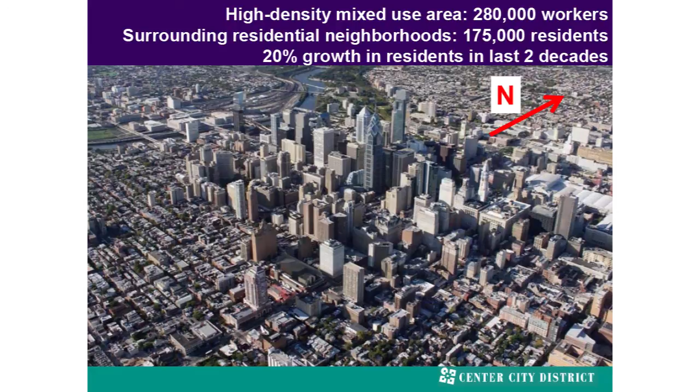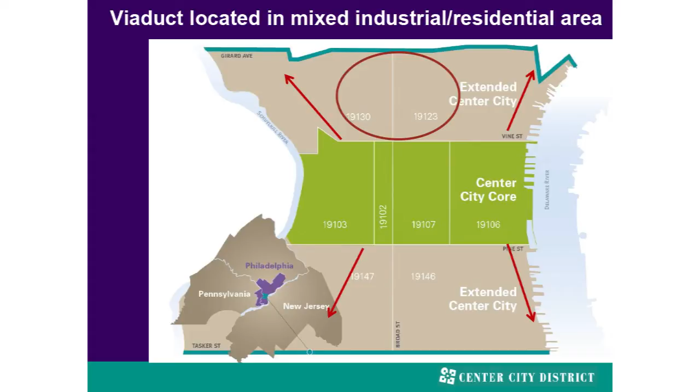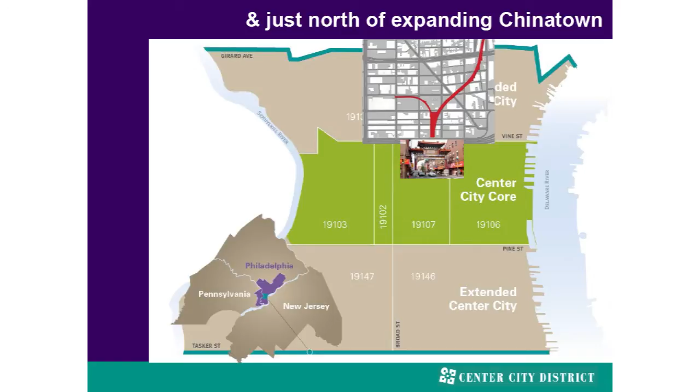So this is an elevated portion. It's just north of the central business district of Philadelphia, in the area where that arrow is located, so we have a very dense 280,000 person employee downtown with a very expanding and vibrant residential area that's grown by about 20% over the last 2 decades. This is just north of that area in an expanding residential industrial area near the business district, but also in what had been a former industrial district. It's just north of our expanding Chinatown community, and there are a lot of issues we've had to work through between two different visions for that area.

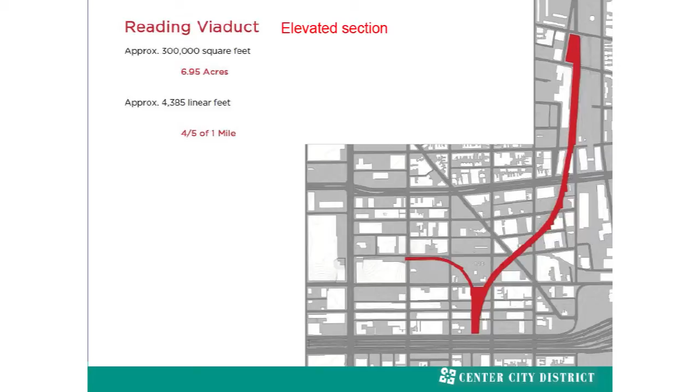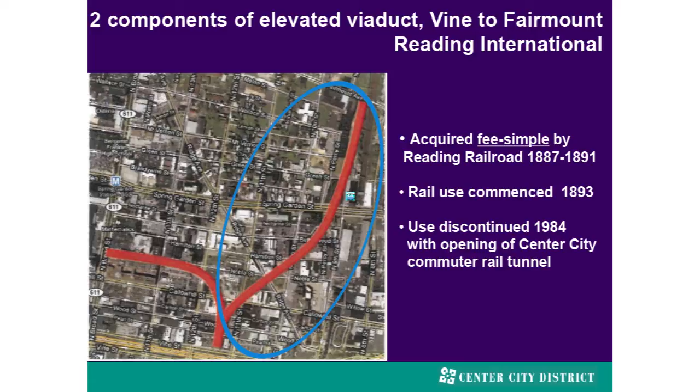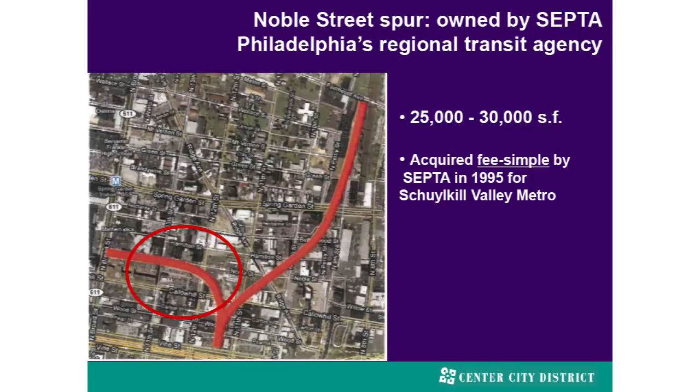The western or eastern branch is still owned by the Reading Railroad Company's successor company, Reading International, who's now in the movie theater business. They built this viaduct as a company in the late 19th century, continuing all the way through till 1984, when a new railroad station made this portion of the viaduct obsolete. The left-hand portion, which is only about 30,000 square feet, the most advanced part of the project, was purchased by our regional transit agency, SEPTA, and had originally been planned for a rail line that is no longer going to be built.

And then Leah will talk about the piece that starts in the dotted red line, which is the underground portion of this. So there is a vision of an integrated, elevated, and depressed portion.

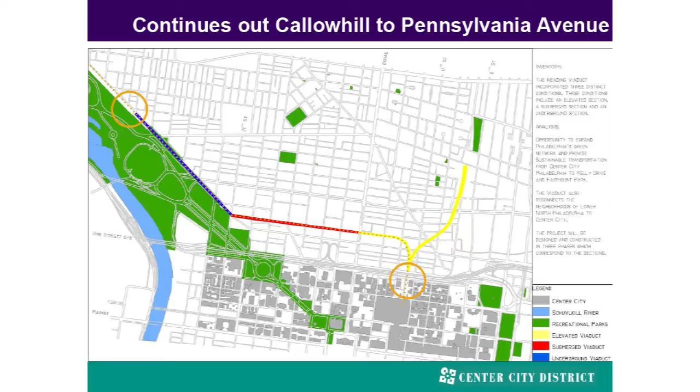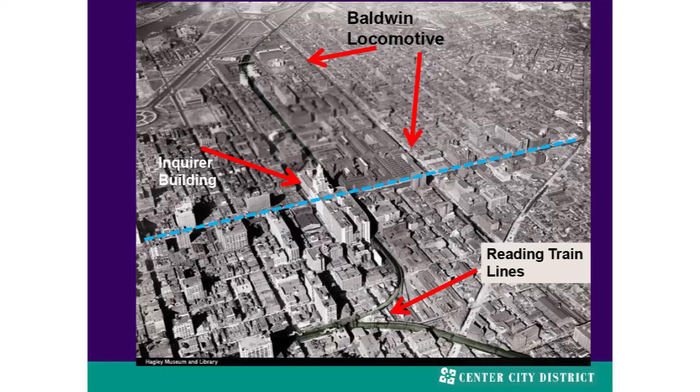This was, as you heard, like yours, a former industrial rail line, but also for us a passenger rail line. The blue line is our Broad Street. Leah will talk more about Baldwin Locomotives, the largest railroad manufacturing company in North America, which was served by this, and then you'll see the Reading portion in the lower area. The trains originated out of a train station that still exists on Market East, the Reading Head House, and underneath that today we have a very vibrant farmers market.

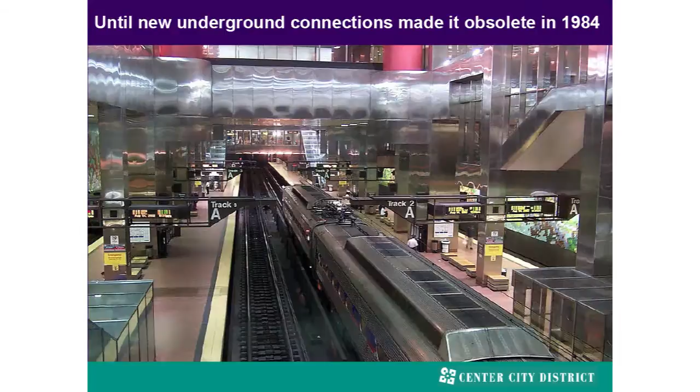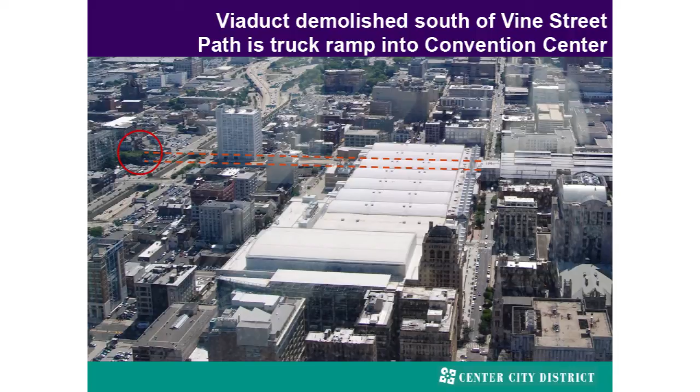This remained in active use until 1984, when that new underground rail connection made it obsolete, and it's been converted into the gateway to our modern convention center. The convention center is the white building in the foreground, and an elevated portion of this was demolished to make way for a truck ramp to come into the convention center, and the viaduct today starts where I've circled over there on the far left.

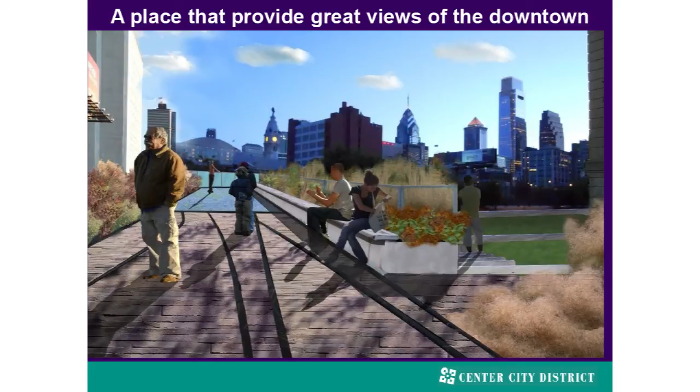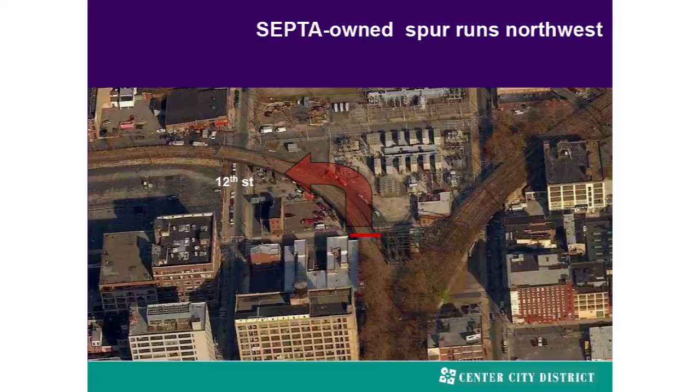So the viaduct today starts just north of Vine Street between 11th and 12th Street. It's a location that provides extraordinary views of the downtown. It splits in half, and the left-hand portion, which is most advanced, is owned by a regional transit agency. The right-hand portion, like your High Line, curves across the grid, giving you this positioning over different streets. It gives you very unique views of landmarks, of iconic bridges, and of endangered buildings, so you get to see the city from a totally different angle.

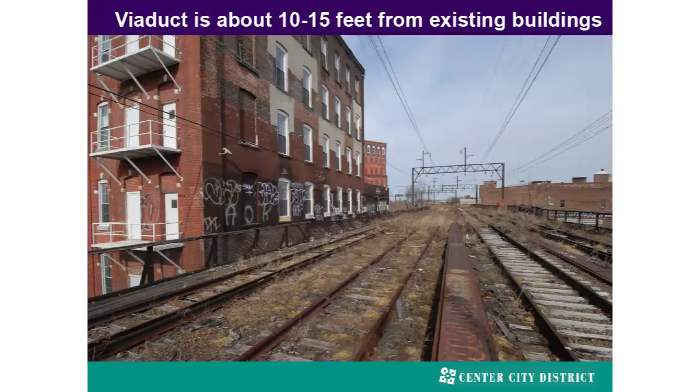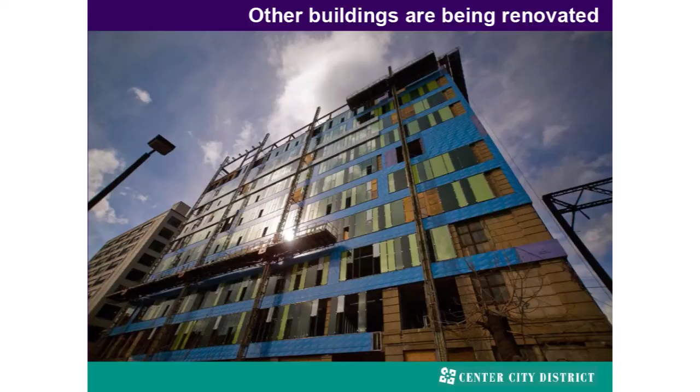It's in very close proximity, as is yours, to older industrial buildings because it was the delivery system for all the industries that were there. So the viaduct is sometimes 10 to 15 feet from buildings, sometimes 7 to 8 feet from various buildings. Many of those buildings have already been converted to condos, lofts, businesses, artist studios. Others are in the process of being renovated, but there are a huge number of vacant and underutilized buildings within this area.

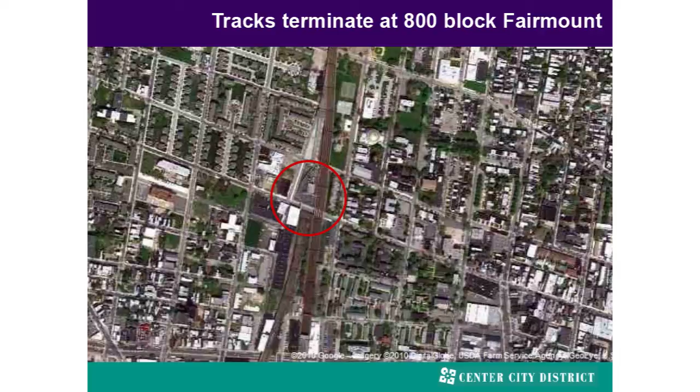Some of them are positioned to have great views, and the viaduct itself terminates up at Fairmount Avenue. During the last 20 years, it returned to natural life with lots of growth occurring, and it became something every student in every architectural program in the region studied.

The real work here began, and I'm delighted Sarah McEneaney is here. She and John, inspired not only by the viaduct itself but by the work here, organized the Reading Viaduct project and began in 2003 to advocate for this project. They've led thousands of tours, only one or two of which are probably legal. None of them are legal.

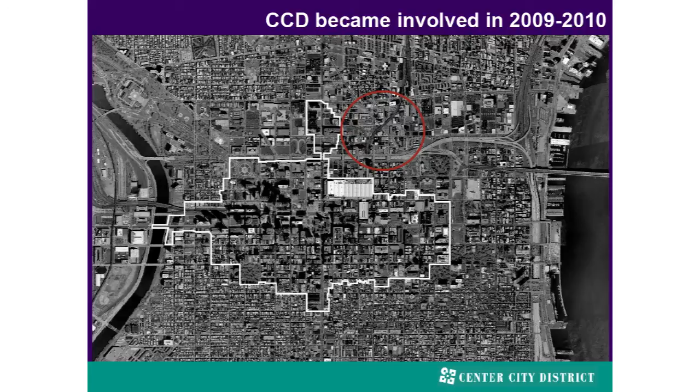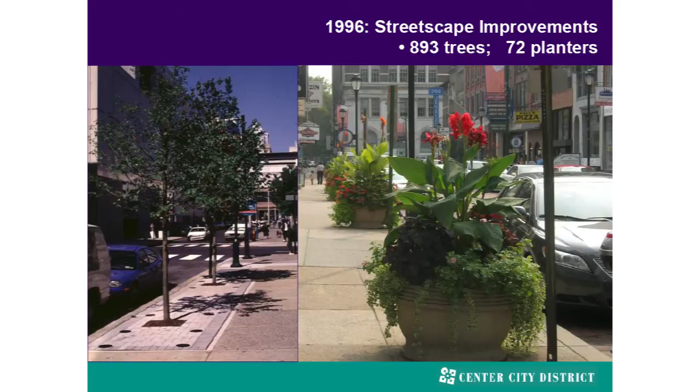But it's inspired many people. We're a business improvement district, and you can see our boundaries here. We became involved in 2009 and 2010. We are like your BIDs — we do cleaning, we do security. We started to do landscape improvements, directional signs, lighting, and have really focused on animating our city center to make it a really exciting place.

We started to move into park development in 2008 with the renovation of a derelict park. We've continued this as part of a broader strategy, seeing parks as an amenity for workers and residents. Our most recent project was a major children's park, opened just last year, creating a great little place within the city — what we thought was a boat pond for well-behaved children became a swimming pool very quickly.

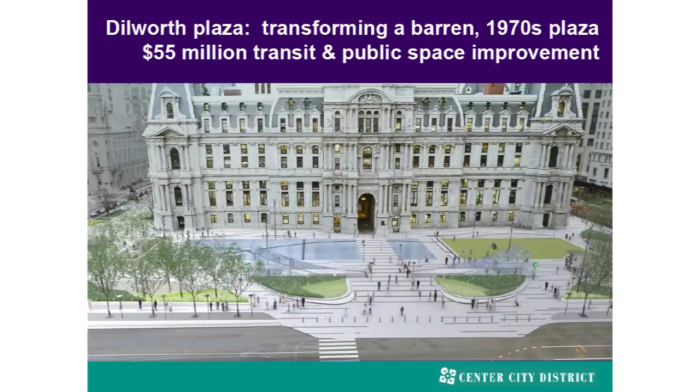But the amenities and importance of these spaces for residents, we saw as very important. Our biggest project to date is a major renovation of the west side of City Hall into a transit gateway, a new green space, new fountains, new public art, a place for public markets and winter ice skating. We're very committed to improving parks, and this one will open next summer.

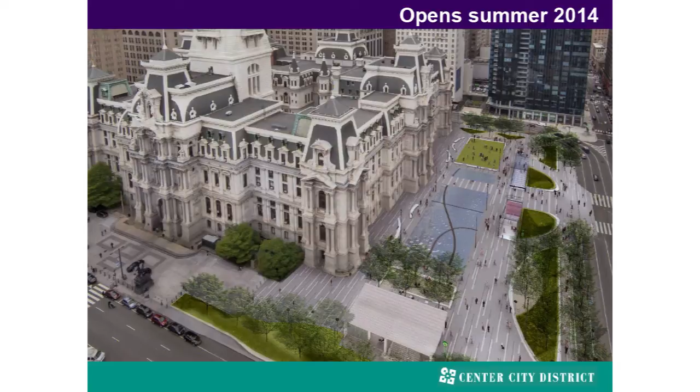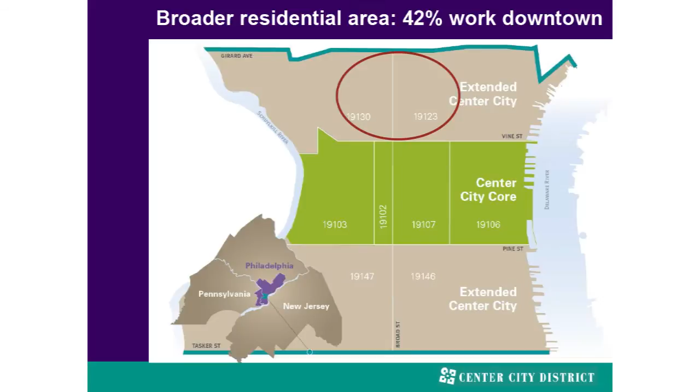So if you look at Philadelphia — and I'll do this quickly — Center Square is where our Dilworth Plaza is; the original William Penn plan had four public parks. The viaduct begins in the circle area and goes to the left and right. This is an area where 42% of residents work downtown, so as a downtown business improvement district, we see this as a place where our workforce lives.

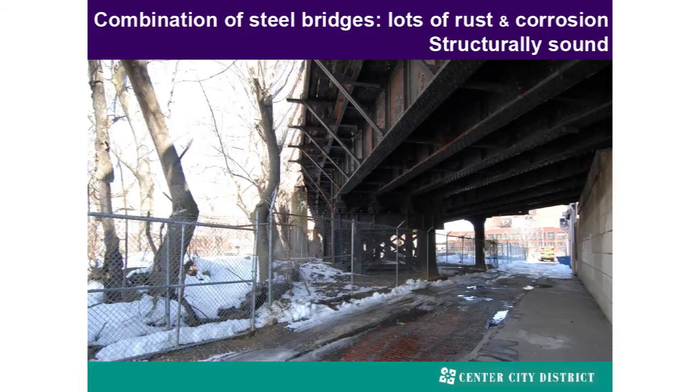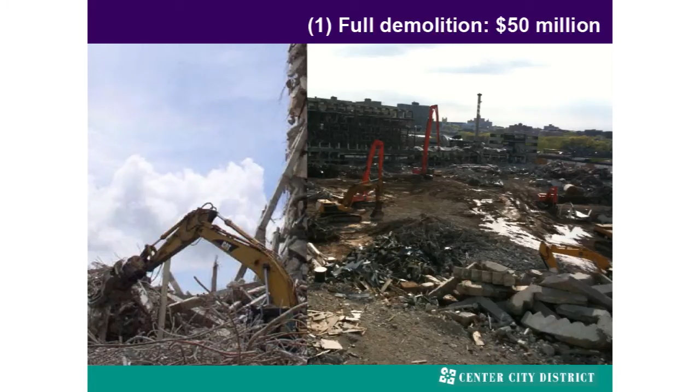Our first consultant team looked at this in 2010 just to document the various components of the viaduct and understand the conditions, because Photoshop's wonderful, but until you understand what's underneath the soil, you really don't know what the cost will be. At the time, there were proposals to knock it down. So we assessed all the environmental contaminants and found it would be $50 million to demolish the viaduct, half of which was to deal with contaminated waste.

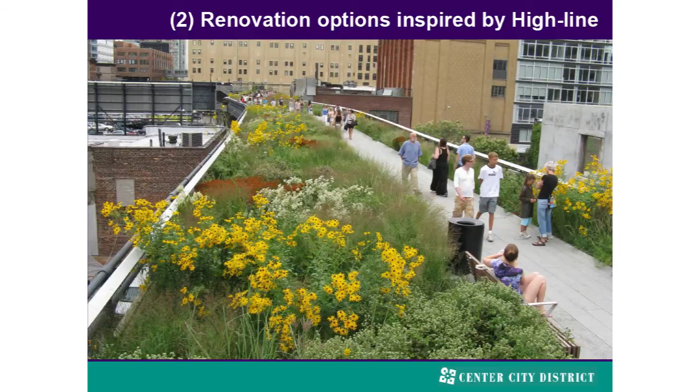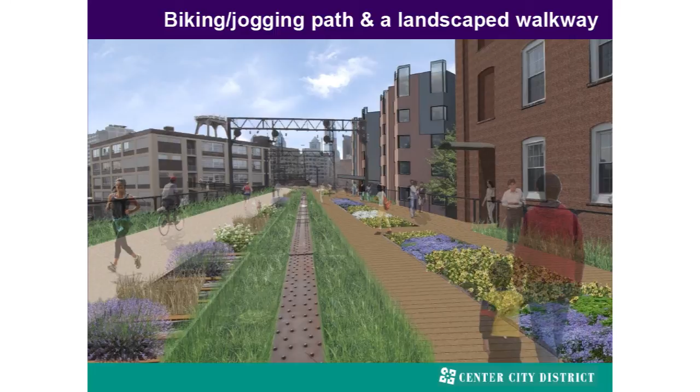We then took our inspiration from the High Line here, working with your organization and staff, but we clearly said we didn't want the Mercedes-Benz that you built here — that was a point of pride. We love what you have, but it needs to be authentic Philadelphia in many ways. So we envisioned a jogging path, landscape walkways, an elevated place. But to me, the fundamental takeaway from your viaduct is it's not so much a connecting path as it is an amenity for a neighborhood, an attraction that draws tourists, but a central anchoring park for a neighborhood — that's the vision that's really inspired us.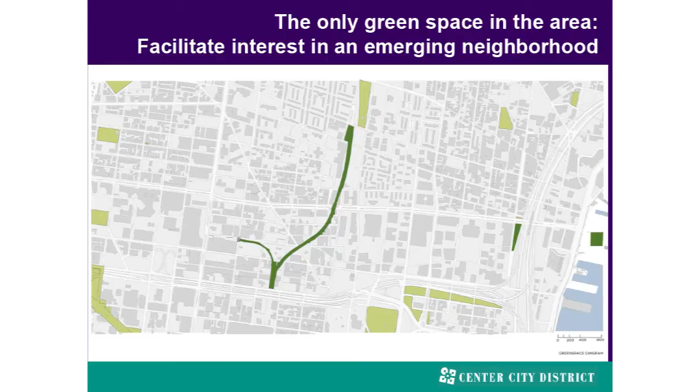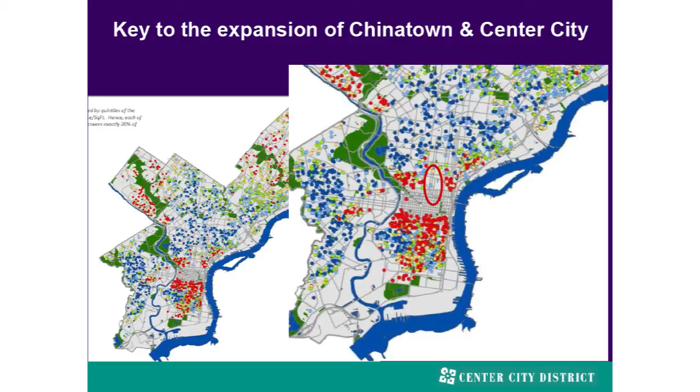It is the only potential green space in this portion of the city, and as this map shows, all the red dots show recent development — what you see is a total void, an absence, a hole in the donut where development hasn't occurred because the viaduct itself is such a blighting influence. But as I said, it offers great views of downtown, and we discovered it was actually cheaper to renovate it than demolish it. That became a threshold point where we said it makes more sense to save it, since the environmental costs in capping and covering it were far less than the $25 million disposal cost.

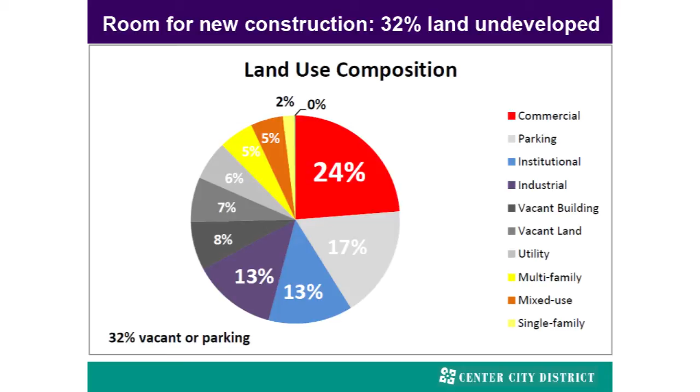Not so important for tonight, but for the project, the Chinatown community had advanced a vision that not only called for renovation of vacant lofts and reuse of vacant land, but their plan initially in 2004 called for the demolition of portions of this so new housing could be built.

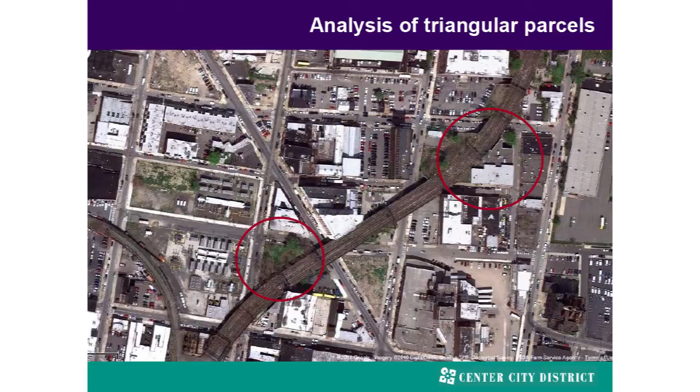One of the important studies we did as part of this project was to look at the triangular parcels, to confirm that affordable housing for Chinatown could be built on triangular parcels adjacent to the viaduct without taking it down. That was a real breakthrough point, because it was knock it down versus preserve it, and now it's about what's the appropriate way to develop next to it.

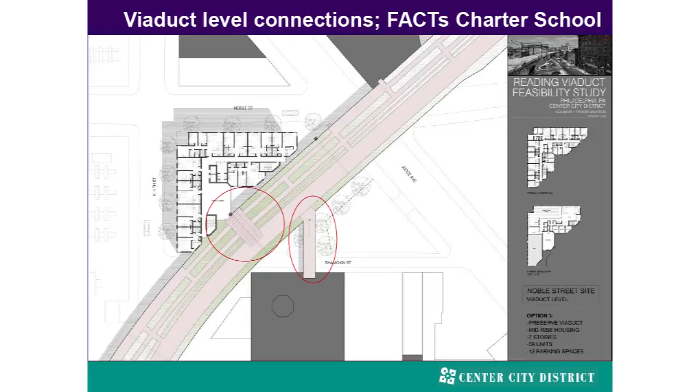So we worked out ways we could develop on and adjacent to the viaduct and connect to it, and the city then did a comprehensive plan for the area that said market rate and affordable housing, we want both. With that, I think there's been a lot of consensus about moving forward.

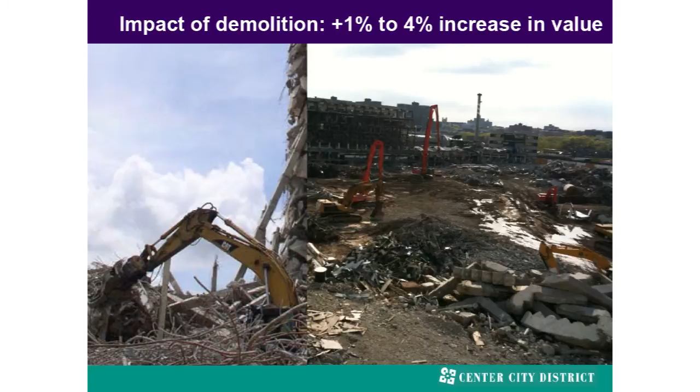Most importantly, to demolish it, the improvement in value was only 1 to 4%. To renovate it, there was a much greater impact from the real estate side.

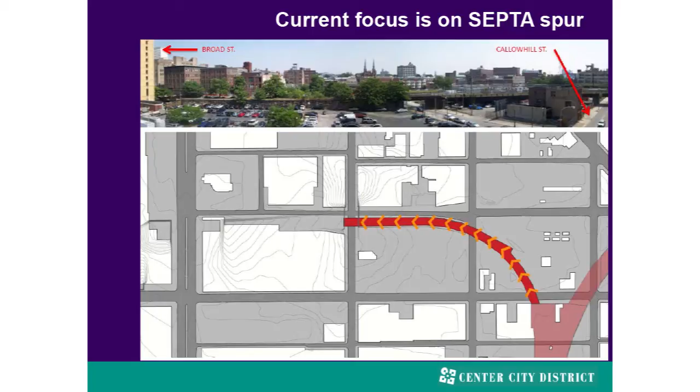Our goal was to do a planning process with the community where the basic message was: respect the industrial character. We don't want something totally modern, we want to capture the industrial past. We want to make it uniquely Philadelphia, priding ourselves on not being like New York, but creating a backyard space for the people who live there.

So the original vision of this was not a tourist amenity, but an amenity for families, for artists, for people with kids in the surrounding neighborhood, but made expandable to connect to the portions to the east and west. The plans that have now been completed connect to our Broad Street and envision a gateway that starts at grade.

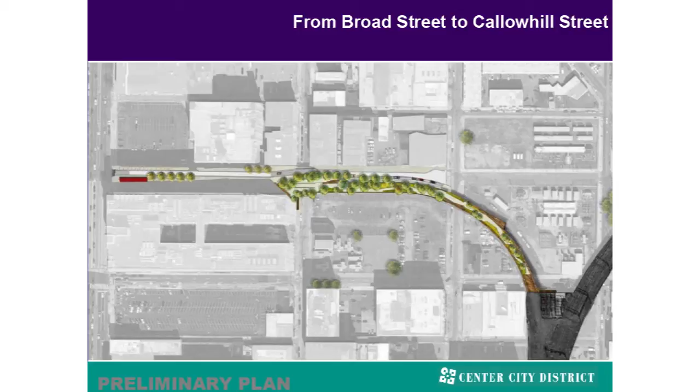There's a trolley car that's been there illegally as a diner for 25 years, which will become a formal part of the entranceway. As I said, it starts at grade where it used to be an industrial entrance, and we're creating a community meeting space there.

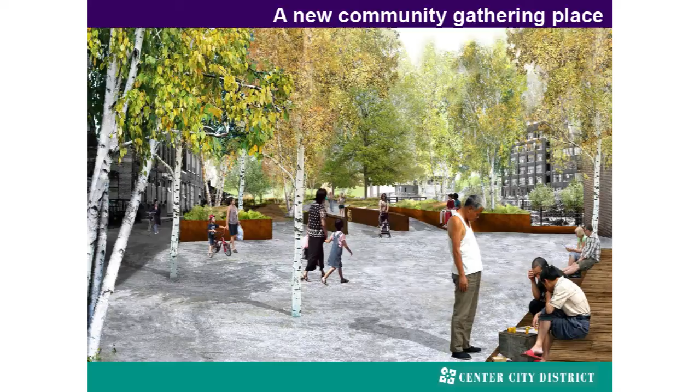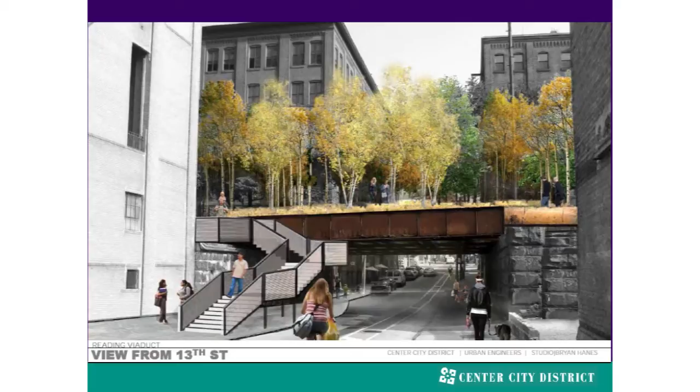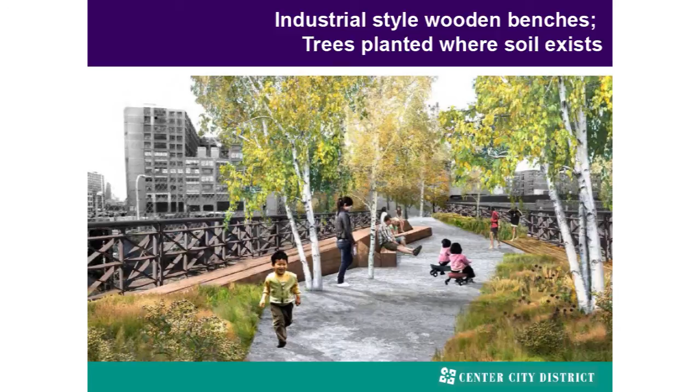Using the elevated portions as planters to fill in, and then where it goes over the street, creating new stairways and doing specific lighting at nighttime because of concerns about the conditions underneath. The whole theme is very generous landscaping with curving trails, taking portions of this and putting in wooden benches that recapture the spirit of the former railroad ties.

And then as you move towards this end portion, we put all the benches, as you've done, to position good views out over the streets.

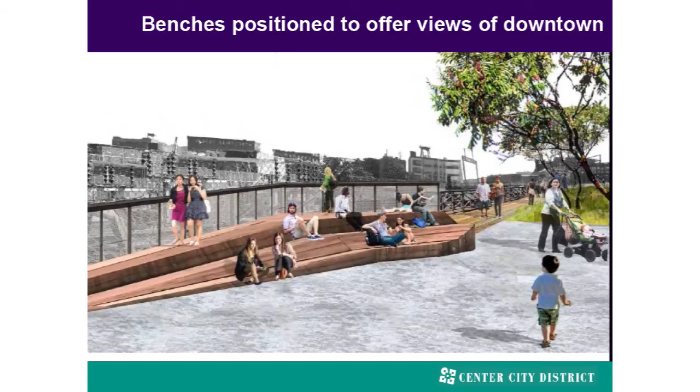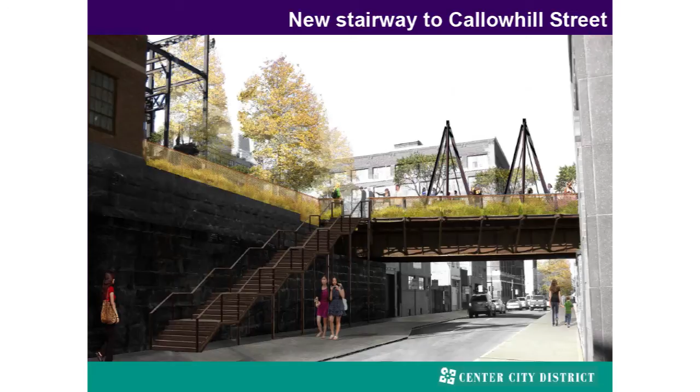And then at the end, or the initial end, we wanted to do these giant backyard swings, made out of sort of industrial style material, which will become a sitting place where you can sit and swing and look out over the street. It will mark a kind of terminus point for the first phase before we break through into phase 2.

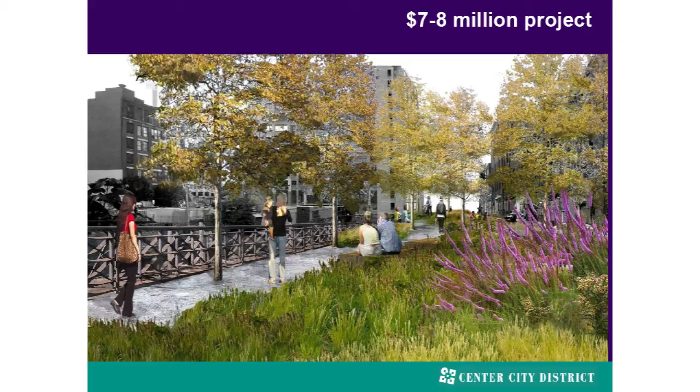So this is really not a $35 million project, but a $7 to $8 million phase 1. We have construction documents complete at this point. We're in the process of getting all city approvals and starting the fundraising process, so we're looking to 2014, maybe 2015, for start of construction.

Our most important issue, which the neighborhood is focused on now, is putting in place the maintenance mechanism. Because as any of you know who've done a project like this, raising the money to build it is only step 1 — it's knowing how to maintain it at a high standard. So we're looking at a business improvement district, traditional fundraising, but for us this will be the first step in what we think will be a project inspired by this one, but in many ways very different.

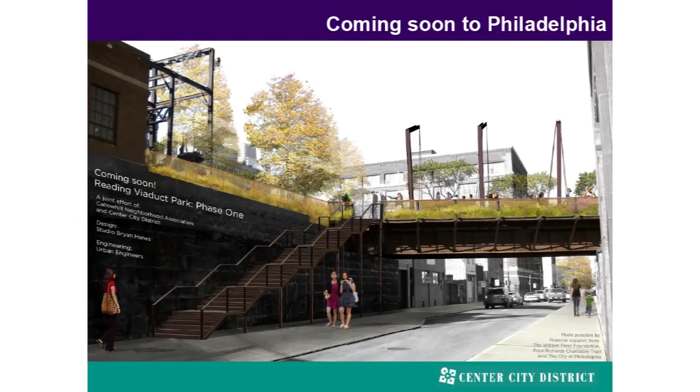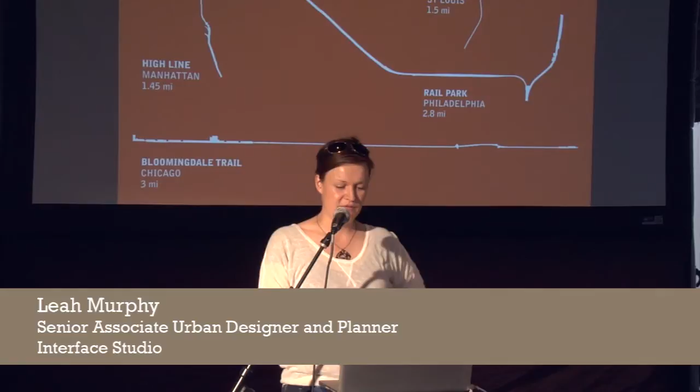This is a graphic we developed showing a number of these urban rails-to-trails projects in different places around the country, all at the same scale. I thought it'd be useful to show this so you can get a sense of how our site compares to the High Line.

Many of you probably know the High Line is just shy of 1.5 miles long, and the majority of it was 2 rails wide. Our rail park in Philadelphia, what we propose to be the entirety of the rail park, is just shy of 3 miles, and the majority of it had 4 rail lines side by side. So it's a much bigger site than the High Line.

It's also interesting to look at their different geographies and compare to something like the Bloomingdale Trail, which is so flat and straight.

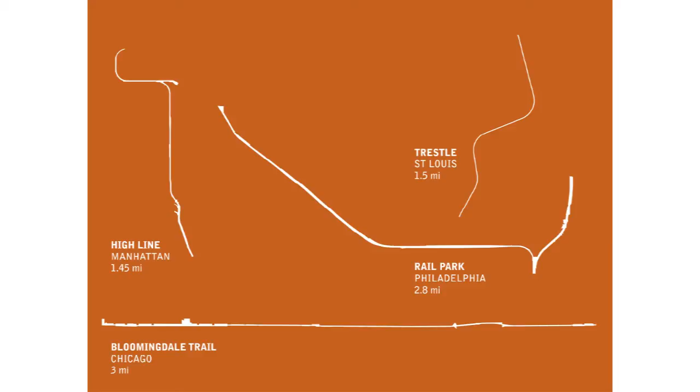Friends of the Rail Park was founded in 2010. We're a very small, all-volunteer organization, advocating for a 3-mile continuous linear park and recreation path that includes the site many people call the Reading Viaduct, which the Reading Viaduct Project has been advocating for over 10 years. Now we're very lucky to have the efforts of Paul Levy and Center City District to help bring that towards implementation.

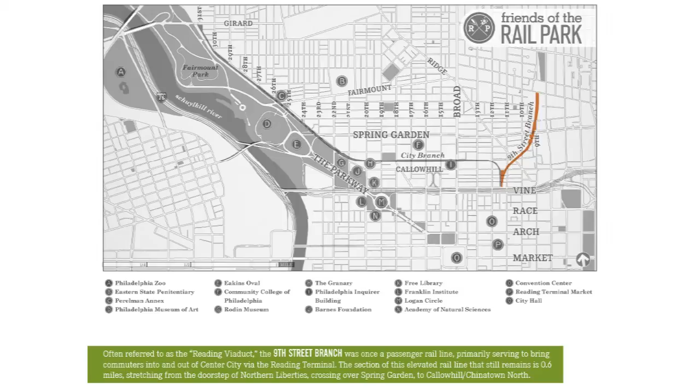I'm going to go into the different parts as we see them, though I won't go into depth on the Ninth Street branch since you've just heard a lot on that piece from Paul. As he mentioned, the Ninth Street branch is the elevated portion, formerly a passenger rail line.

It's 0.6 miles long. Many people who live and work in this neighborhood, Callowhill and Chinatown North, recognize the viaduct as really the only potential green space that exists in that area. It's a very hardscaped landscape in Callowhill especially, it's really the only swath of green if you can see it poking over the retaining wall.

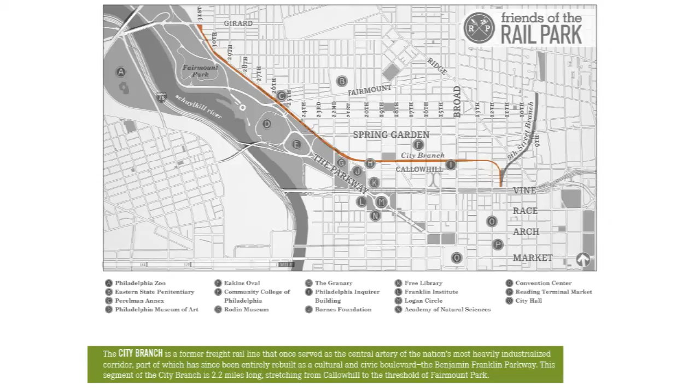The city branch, as Paul mentioned, is a historic freight rail line that at one time served as the lifeblood of one of the world's most heavily industrialized corridors. It's about 2.2 miles long.

To give you a sense of how it looked when it was being constructed, it existed before it was depressed below street level, but there was a lot of conflict between different modes of transportation where the rail line crossed over Broad Street, with several parallel tracks crossing Broad. There were daily deaths, horses getting snagged, carriages and things. It was a bad situation.

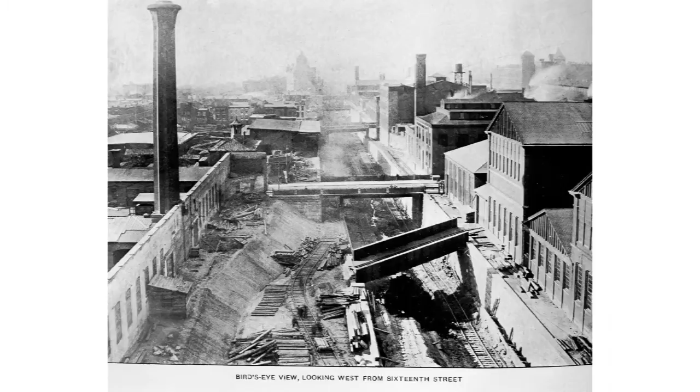So they ended up depressing the city branch below street level in the latter 10 years of the 19th century. This is actually a view looking west along the city branch showing that construction process of sinking the rail lines underground. And it's funny, almost exactly after they finished depressing the rail lines,

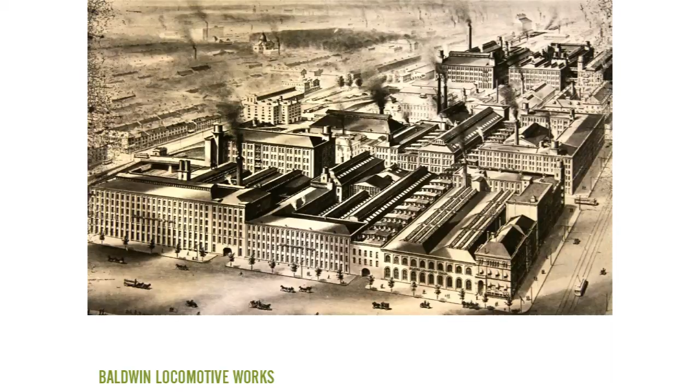that entire industrial corridor started trending away from its use as heavy industrial use. But at one time this was by far the heaviest industrial user of the city branch industrial freight rail line, Baldwin Locomotive Works, which was the world's leading producer of train engines.

The city branch is mostly open to the sky. It's all below street level, but the majority is open to the sky, except for this 3,000-foot long tunnel that goes underneath Pennsylvania Avenue.

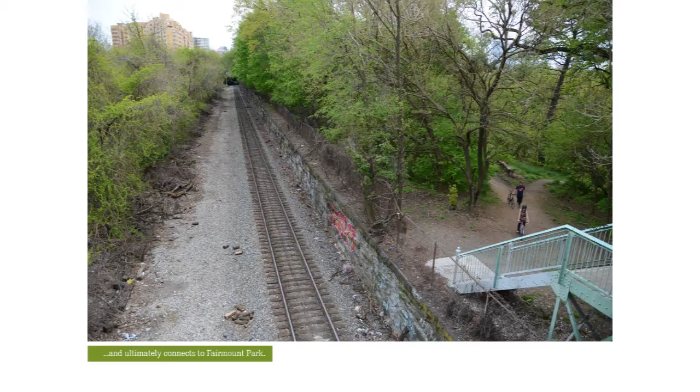As I mentioned, almost right after the city branch was built below street level, city planners in Philadelphia started having a very different vision for the future of that part of the city. And they started planning what is now today the Benjamin Franklin Parkway, which is home to many of Philadelphia's most treasured cultural and arts institutions.

So while Paul is talking about the opportunity of the 9th Street branch as being somewhat of a neighborhood park, really serving those residents who don't have any green space to call their own, we see the entire 3-mile route as an opportunity to serve a number of different people, including tourists and residents who would like to have a great recreation path to connect to some of those destinations along the way.

But sometimes when you just see them with fresh eyes, you recognize that there is such potential there, and actually the existing unique character of something doesn't really need to be changed that much. That's kind of a value we've brought into a visioning process with many community groups. But it's something we wanted to have a dialogue about, because a lot of people do really love the character of the route as it is now.

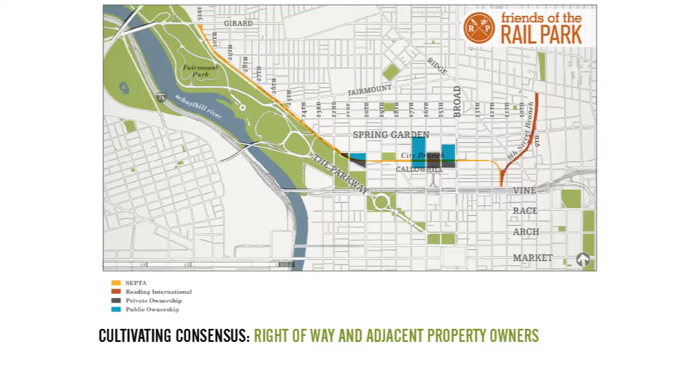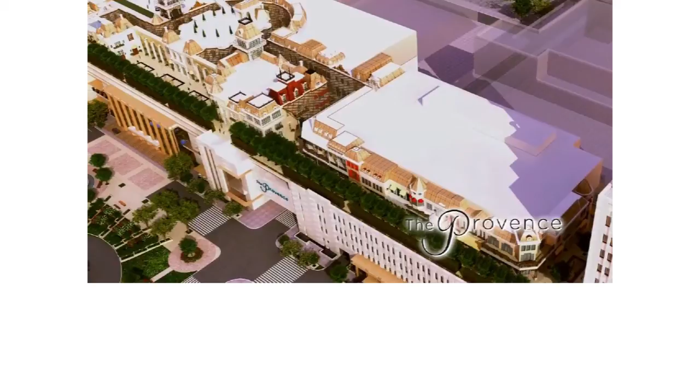So one of those — let me just go back for a second. Those 2 blocks directly adjacent to Broad Street, which is, as Paul mentioned, kind of our north-south civic axis, were just acquired by a Philadelphia developer who proposes to build a very large casino and entertainment complex adjacent to the city branch. His current plans propose to deck over those two blocks entirely, which we feel would create a pretty big barrier to having a strong connection to Broad Street, which we feel is one of the best opportunities of the entire 3-mile site.

This developer is actually one of 6 developers vying for a second casino license in Philadelphia, and that process of selecting who gets the second license will go through December. So until then, we won't really know whether or not this will go forward. That's one of the reasons why we chose to do a conceptual design for a portion of the city branch that passes by where that casino entertainment complex might be.

So this is showing kind of a switched orientation for you, but Broad Street there going left to right is actually our north-south axis. You'll see there's a white tower building just north of Callowhill, where Callowhill and Broad meet. That is the Philadelphia Inquirer building, which is where Philadelphia's principal paper was produced and published and printed for a number of years, up until 1992, when the Philadelphia Inquirer moved out to the suburbs.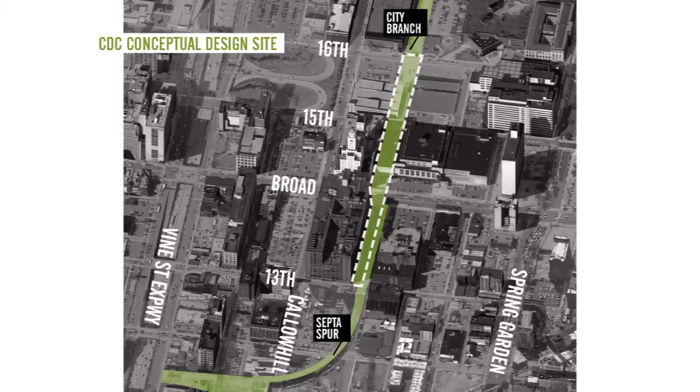So that's part of the property that was acquired for this potential casino and entertainment complex. And you'll see that's the city branch right there next to it.

As I mentioned, we really saw the intersection with Broad Street as one of the biggest opportunities for creating a really inspiring civic space. It's right adjacent to that site, and this is also one of the reasons why we decided to do a conceptual design for this site.

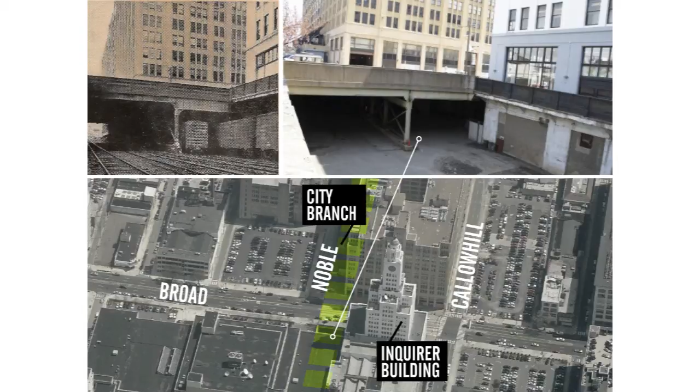This is showing behind the Inquirer building, there's a bridge structure maintained by the Pennsylvania Department of Transportation. They contacted us early last year and said they had to replace this bridge structure because it was too aged and needed to be replaced. But one of their scenarios, their low-cost scenario, was actually to fill in underneath the Broad Street Bridge, which would create a wall there in the city branch, rather than having this continuous path going underneath Broad Street and connecting to the SEPTA spur.

So this is showing down in that pit, looking east and out the other side. Along the entire 3-mile route, there is only one structure that encroaches on the right-of-way itself, and that is this 1990s addition to what is today the school district building, but was designed in 1948 by Albert Kahn as the Rotogravure building, which was actually part of the Philadelphia Inquirer newspaper complex.

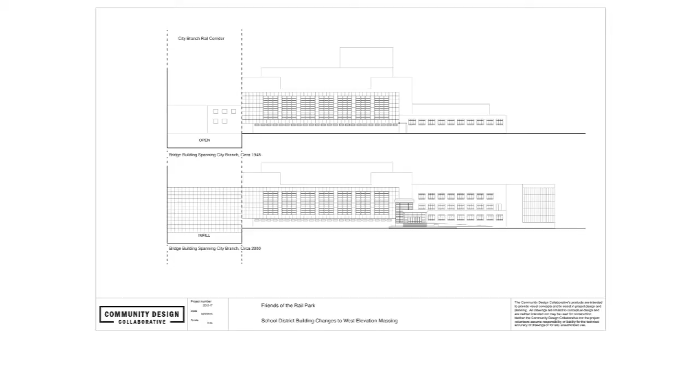The addition is just this windowless block there in the middle of that image. If that building were not there, you could actually walk from one end of the rail park to the other end continuously without having to cross a single street. So that was another part of it. This is just showing an elevation of how the building was modified over time. There's some sensitivity there because it is a historically significant structure.

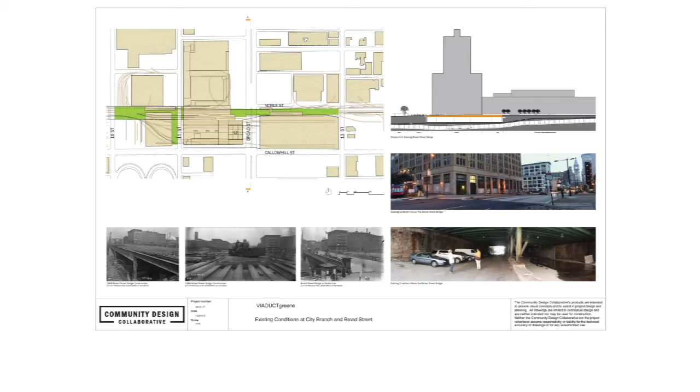And this is just showing in plan view. The green areas there in the upper left are the parts of the rail park of the city branch that are open to the sky. You can see that the infill building between Broad Street and 15th Street fills in the right-of-way. So just taking you back to the street level, this was kind of the grand unveiling rendering produced as part of this conceptual design process.

We were very fortunate to have an amazing design team, all volunteer, headed by Olin, the Olin Partnership, and Bohlin Cywinski Jackson, and CVM Engineers and VJ Associates. They did such an incredible job, and I feel they really highlighted the opportunity here and showed what the potential is for the city branch.

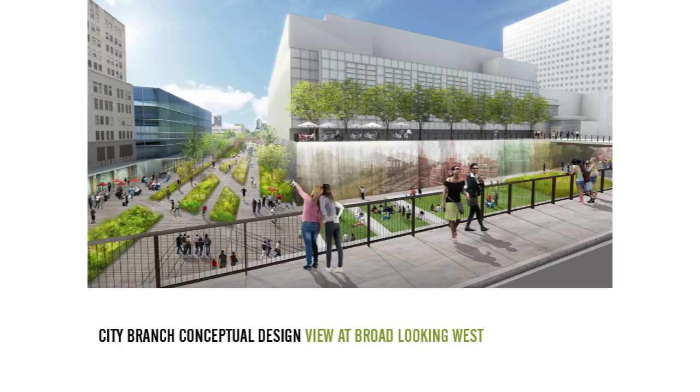You can see it doesn't really feel like a scary space down there. You don't really feel like you're underground at all. One of the more clever moves that I really appreciated, and a lot of people have commented on in the past few months after we unveiled these designs, is the addition of this sloping ramp between the school district administration building on the right and Broad Street in the foreground, which would create this grand entrance from Broad Street itself.

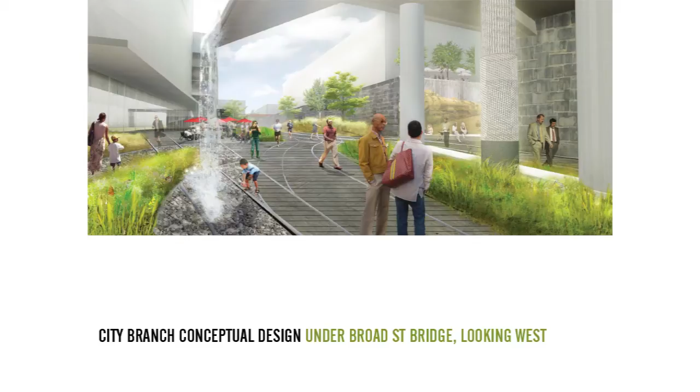This is a view from the same vantage point, looking in the same direction, but actually underneath the Broad Street Bridge, looking west. You can see they thought about how to integrate some water features, and stormwater management was definitely one of the focuses of how we maximize the city branch's potential for stormwater management, which I'll come back to.

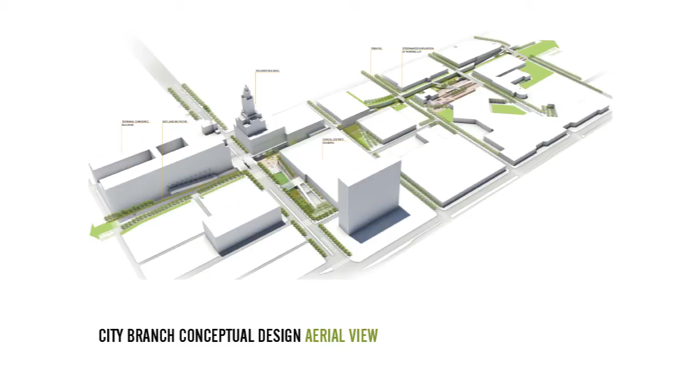When we initially started this process, we wanted to focus on a very small stretch of the city branch, but the design team made an excellent point that we should extend the site to include the Community College of Philadelphia campus, which is close to the top of the image there, really creating this anchor between Broad Street and the CCP campus.

This turned out to be a wonderful idea because they're about to go into their own campus master planning process. When we met with them to share these ideas, they were absolutely thrilled and really excited to integrate the concept of turning the city branch into part of their campus, because they don't really have a lot of green space.

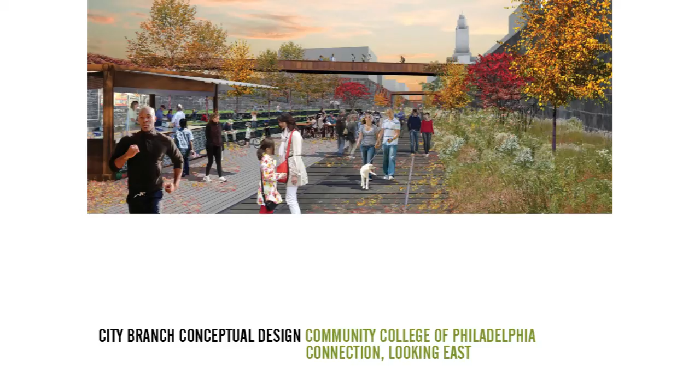Overall, Philadelphia has a very robust green stormwater infrastructure implementation effort going on right now through the Philadelphia Water Department, who has several billion dollars that they're committing towards trying to manage stormwater at street level rather than have it go into the combined sewer. So there's a huge opportunity there to tap into some implementation funds.

This one half-mile segment of the 2.2-mile long city branch could manage effectively 37 acres of street runoff catchment area, which is a tremendous amount of area.

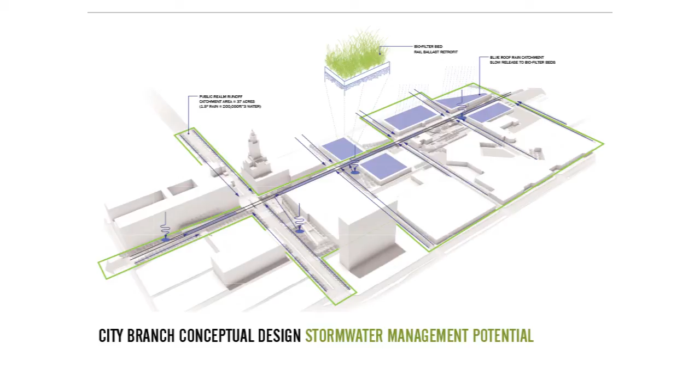Also, just to come back to the concept of cultivating consensus, we also have been kind of at a point of disagreement with the city itself on whether the city branch should be used for a linear park or what it was originally acquired by SEPTA for, which is transit uses.

Earlier this year, and Paul made mention of the Schuylkill Valley Metro, which was this idea from the mid-90s of creating, reestablishing a commuter rail line from Philadelphia 62 miles out to Reading, Pennsylvania. That idea kind of fizzled out by the mid-2000s. So when this plan, as a part of the comprehensive Philadelphia 2035 plan, came out earlier this year to reintroduce some sort of transit use into the city branch, we were a little bit surprised to hear that.

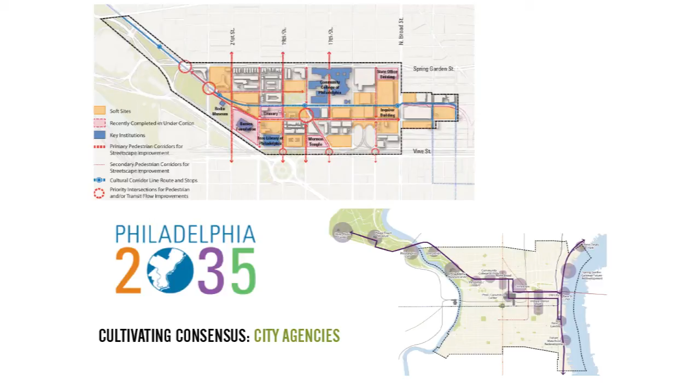But now instead of light rail, they're proposing a bus rapid transit system that instead of serving primarily commuters would be serving more tourists and connecting to the zoo and the other destinations that I highlighted on that map. Once we heard that this was their plan, we are open to visions that include both uses in a parallel way, that they could happily coexist in such a wide right-of-way.

We immediately launched an advocacy campaign, an outreach campaign to our supporters to ask the Planning Commission to include the city branch as a part of a recreation and trail network in Philadelphia. And ultimately it worked, and they agreed to include it in the plan as an alternative vision for the city branch.

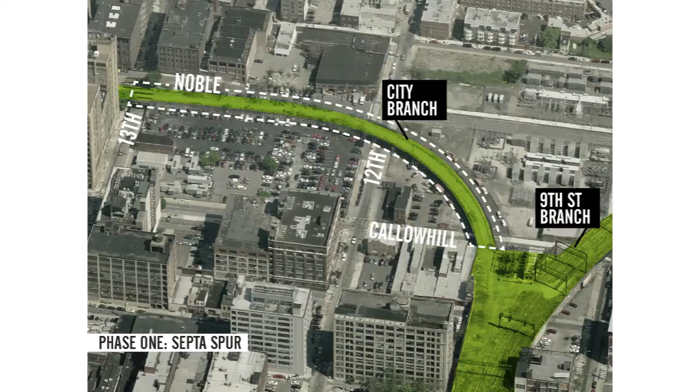So now we're kind of focusing our efforts on the SEPTA spur, which is the phase 1 that Paul talked about, and we're happy to be partnered with Reading Viaduct project and other people who are strongly in support of the project and trying to raise funds for the operations budget for the first phase of the project, which is just thrilling. And that's it.